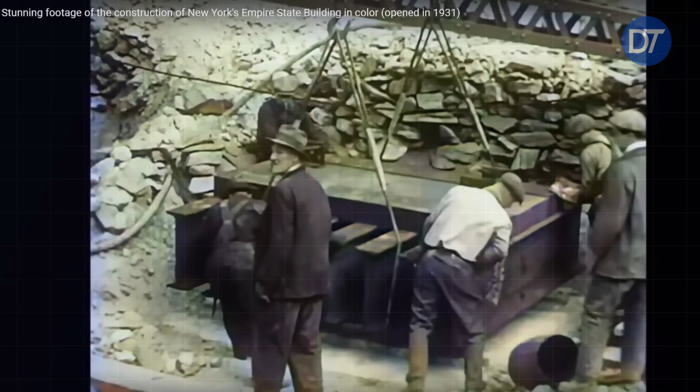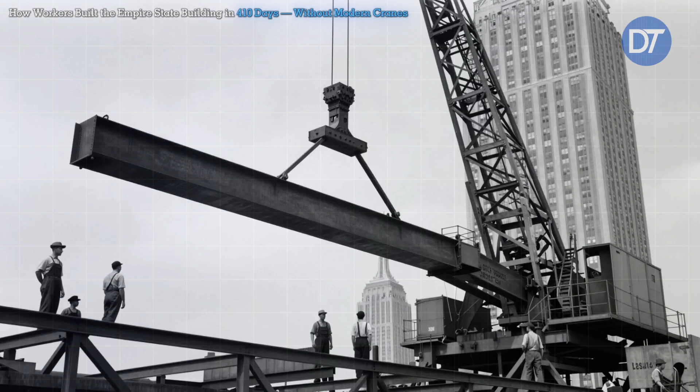The lot was a single block in Midtown Manhattan, boxed in by traffic on every side, and the contract on it called for the tallest building in the world to be standing there in a little over a year. No beam could be stockpiled. No brick could wait. Every piece that arrived had to travel from the truck to the derrick to its place in the sky that same morning, and it had to arrive in the right order.

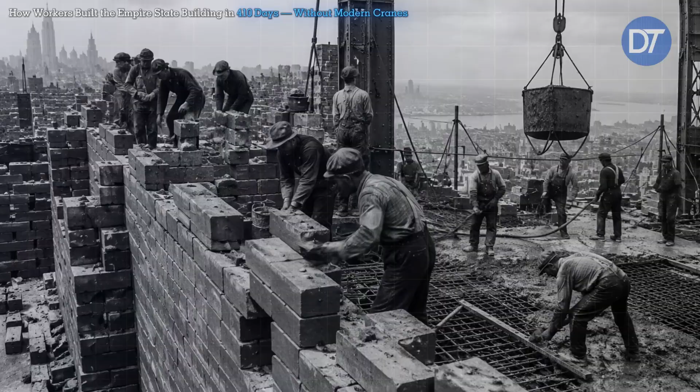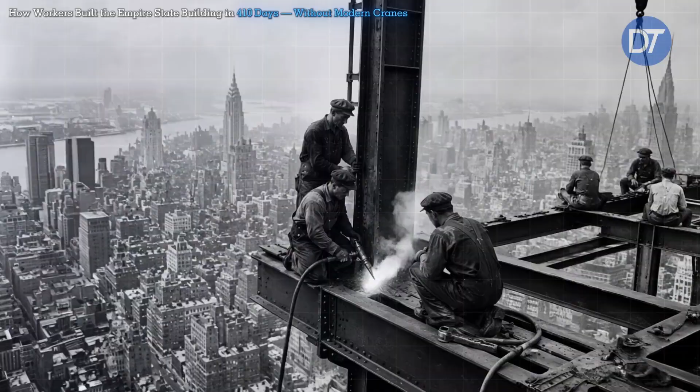There were no cranes standing over the block, the way a modern site would have. Each piece was raised by a derrick bolted to the frame itself, a machine that climbed the tower as it grew. Before the first column ever moved, the project had to be reduced to a sequence of movements that could be repeated without hesitation. That meant deciding not only what the building would look like when finished, but what order every piece would have to follow on its way there.

A column could not simply be delivered when it was ready. It had to arrive when the crew, the derrick, the truck, and the workers above were ready for it. A delay at one point could move through the entire chain. On a site this tight, there was no spare corner where a mistake could be parked and forgotten.

They had to do it while the streets around the site stayed open to traffic, while the neighbors kept the light in their windows, while the money grew tighter every week as the Depression closed in, and while a rival tower a few blocks north had already taken the title they were chasing. That rival was the Chrysler Building, which had raised a spire hidden inside its own crown to reach 1,046 feet and had become, briefly, the tallest structure ever built. The tower rising on Fifth Avenue was designed to pass it and to keep passing whatever came next.

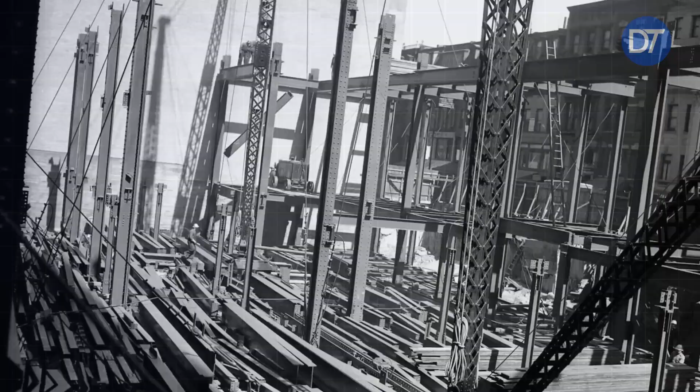The site also had to be designed around the city that already existed. Fifth Avenue could not simply become a private construction road. Pedestrians, automobiles, shops, offices, and neighboring buildings continued their ordinary routines while the tower rose beside them. The work, therefore, had to fit into the rhythm of Manhattan rather than stopping it.

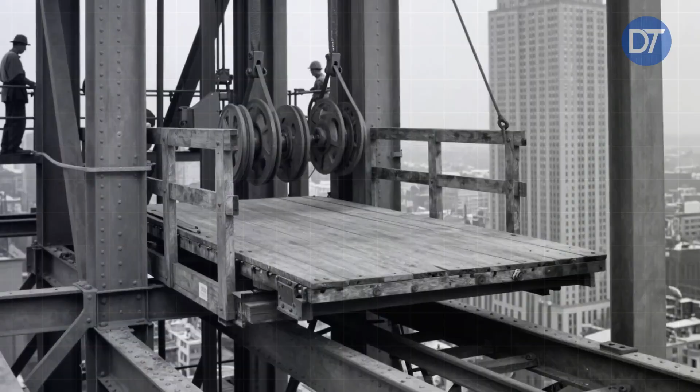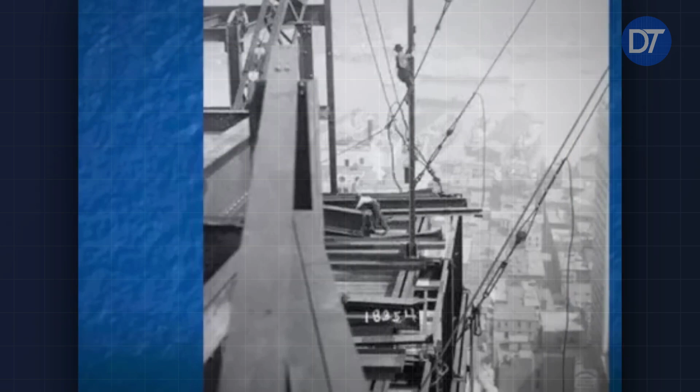Trucks arrived, unloaded, and disappeared. Materials moved upward instead of spreading outward. The higher the building climbed, the more important that discipline became, because every square foot of empty space on the ground was already claimed by something else. The Empire State Building is remembered as a race to the sky. It was really a problem in scheduling, and the height turned out to be the part that came easy.

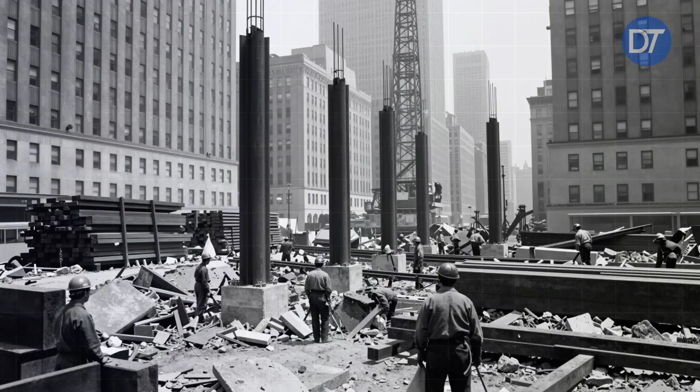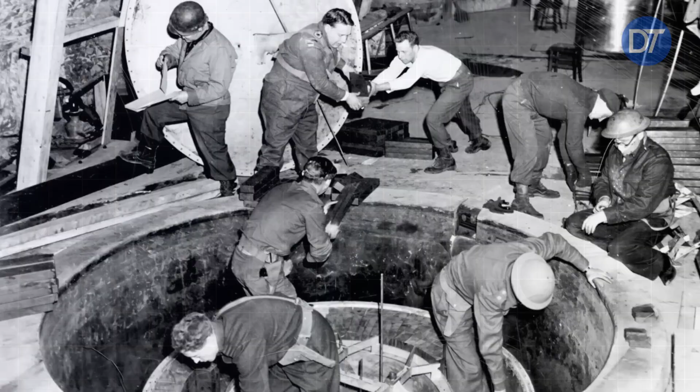This is the story of how 102 floors of steel went up in 410 days. It is the story of a construction site run like a moving factory, where a beam rolled in a Pittsburgh mill could be riveted into the New York sky within days of leaving it. It is the story of the roughly 3,400 men who did the lifting, and whose names the record mostly failed to keep. But before any of that could be scheduled, the design had to survive a set of problems that had defeated every builder who tried to go this high.

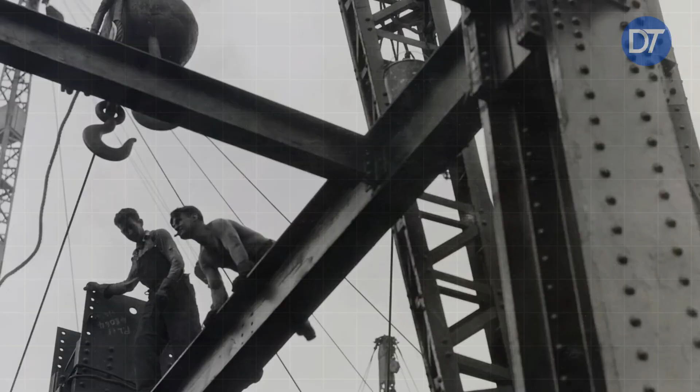That is an easy detail to overlook when looking at the finished building. A completed skyscraper gives no visible clue about the choreography required to assemble it. The finished lobby does not show the delivery schedule. The observation deck does not show the narrow rails used to move materials. The polished stone does not show the men waiting for a hot rivet to arrive.

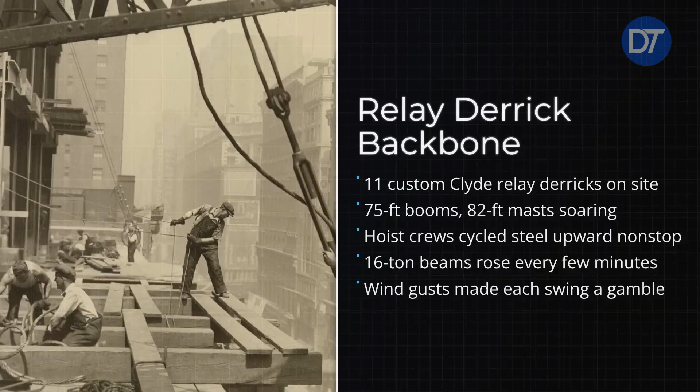The building appears permanent and still, but during construction, almost everything about it was temporary. The derricks, the tracks, the platforms, the work routes, and even the positions where men stood from one day to the next. The first answer was the old one.

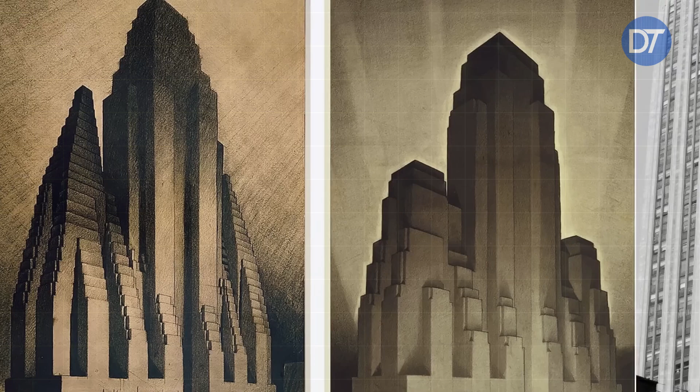For centuries, the way to build tall was to build heavy, with load-bearing walls of stone and brick that carried the weight down to the ground. It was proven, and it was fireproof. It was also impossible here. At 100 stories, the walls at street level would have to be so thick to hold the floors above them that they would swallow the ground floors whole, and the ground floors earned the most rent. A building that ate its own most valuable space was not one anyone would finance.

The second answer was concrete. A reinforced concrete frame would be strong, and it would resist fire better than bare steel.

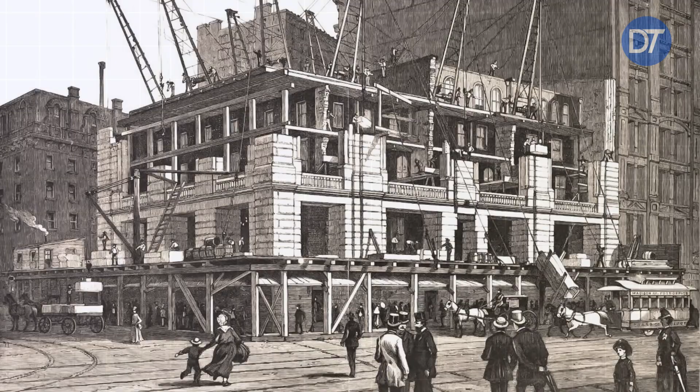But concrete has to be poured in place and then left to cure, floor by floor, and curing takes days each time. The 10th floor cannot be poured until the 9th below it is hardened enough to carry it. Multiply that wait by 100, and the schedule was gone before it began.

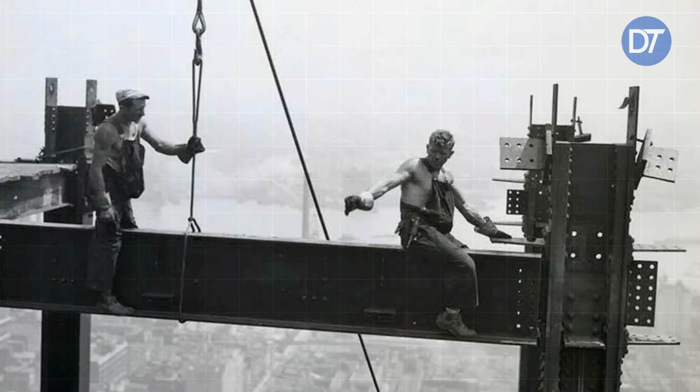The decision to use steel solved one problem and created several others. Steel could carry enormous loads without consuming the huge amount of floor space that masonry walls would have required, but steel also demanded precision. A column had to meet another column at exactly the intended level. A beam had to arrive where the crew expected it.

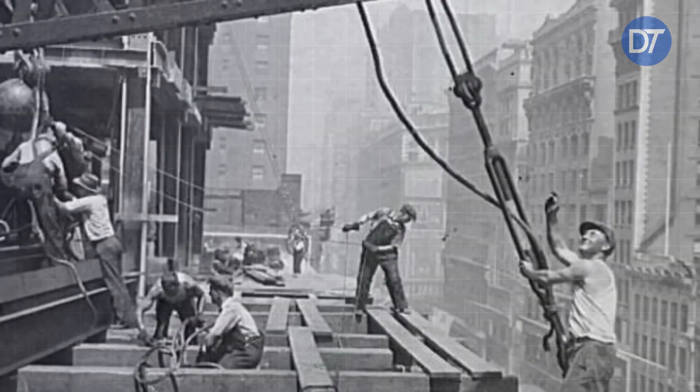Holes drilled at the mill had to line up when separate pieces met hundreds of feet above the street. There was little opportunity to improvise once the pieces were in the air. Accuracy had to be built into the process before the material ever reached the site.

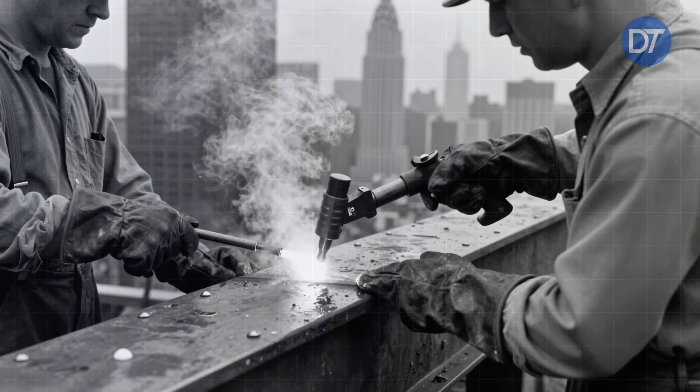The third answer kept the steel, but built it the ordinary way, with materials stacked on site and lifted by cranes standing on the ground. It was standard practice, but it needed two things this site could not give it. It needed room to stack the steel, and there was none. And it needed a crane that could reach the top when no crane on the ground could reach the 80th floor. The lifting could not stay on the ground. It had to climb with the building.

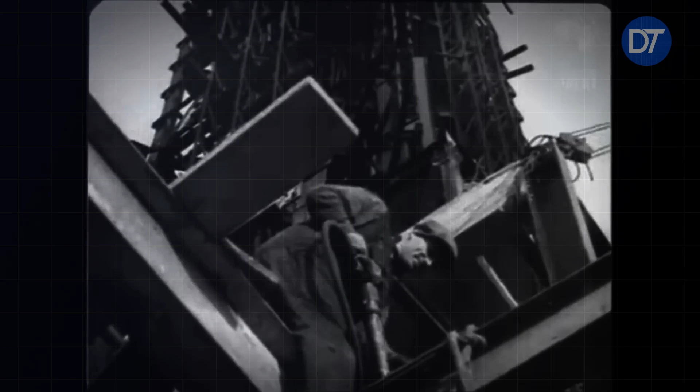The solution was to stop thinking of the site as a building plot and start running it as a production line. The steel would be cut, drilled, and fitted in the mills before it ever reached Manhattan, so that nothing had to be worked on at street level.

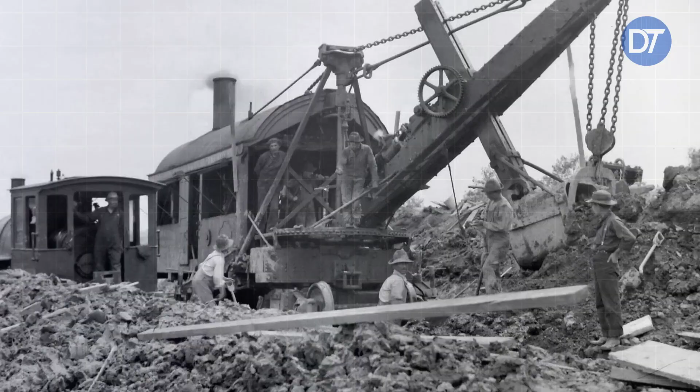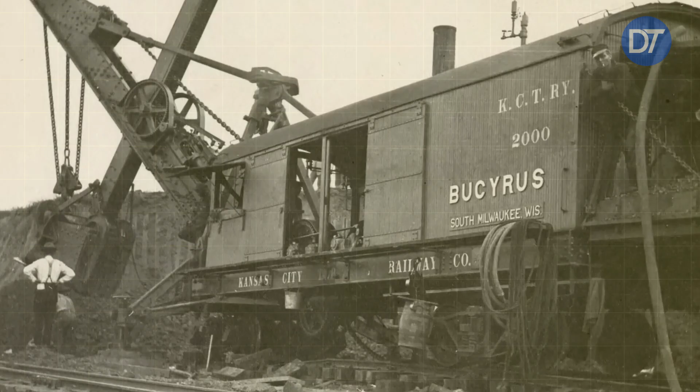It would be delivered just in time, scheduled almost to the hour, so a beam arrived, was hooked, and was lifted without ever touching the ground, and it would be raised by derricks bolted to the frame itself, machines that hauled the steel up a few floors, then were taken apart and rebuilt higher, leapfrogging up the tower as it grew.

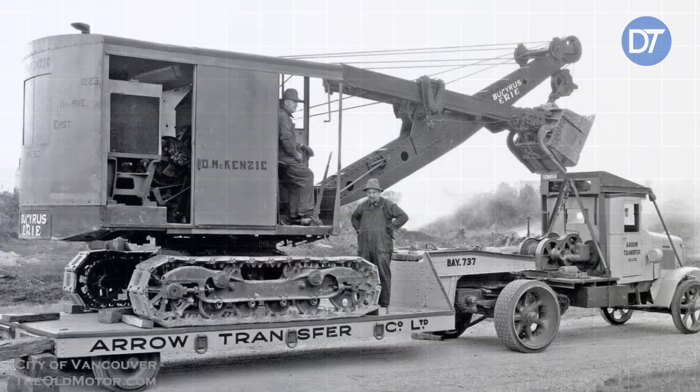The production line idea therefore extended far beyond transportation. It shaped the relationship between the drawing office, the steel mill, the truck driver, the derrick operator, and the men on the frame. Each group depended on the one before it. The drawings determined the pieces, determined the load, determined the delivery, determined the lift, determined when the next crew could begin. What looked from the street like a collection of separate trades was, in practice, one connected operation.

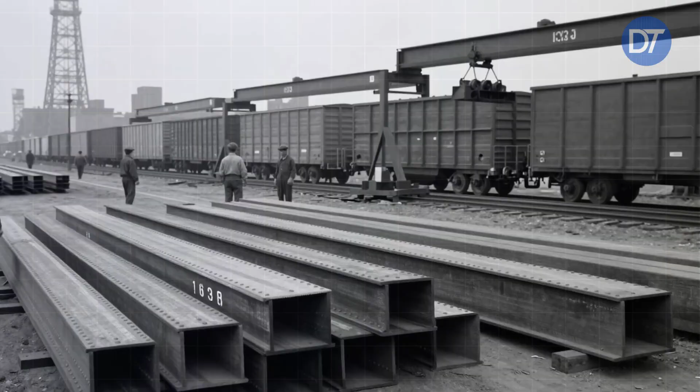The thing that made the site impossible was the same thing that made it fast. Because there was no room to store anything, nothing was allowed to wait, and because nothing could wait, every delivery had to be timed to the moment it was needed. That timing is what let thousands of men work the same cramped block without ever standing in each other's way.

The developers, John Raskob and the former governor Al Smith, had formed a company to build it and handed the job to the contractors Starrett Brothers and Eken. The architects, Shreve, Lamb, and Harmon, drew the whole design in a matter of weeks.

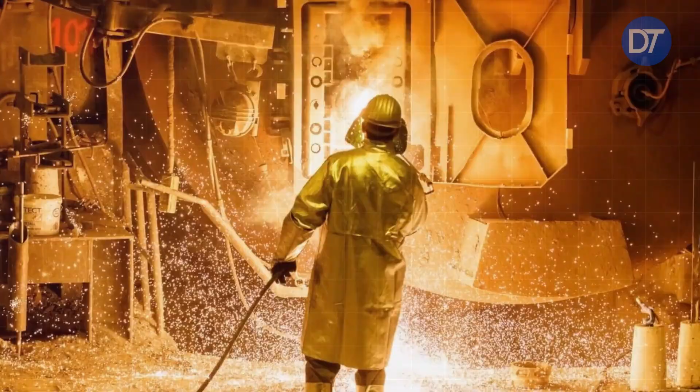The speed was not simply the result of men working faster. It came from removing pauses. If a crew finished one operation and had to wait for the next material, the whole advantage disappeared. If material arrived too early, it occupied space that another crew needed. If it arrived too late, workers were left standing idle. The remarkable achievement was the narrow margin between those failures. The building moved quickly because the process around it was designed to keep moving.

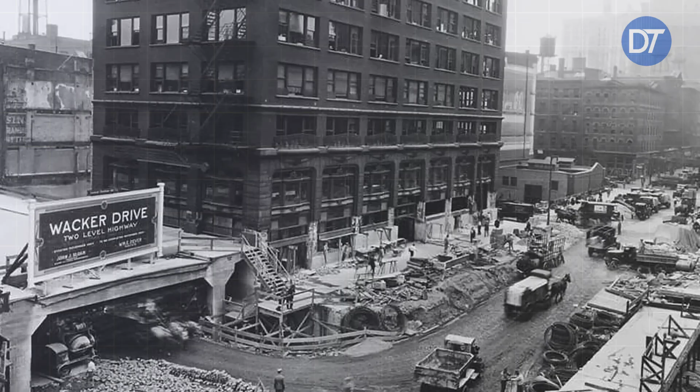What they were building was a steel skeleton 102 stories tall, rising 1,250 feet from the pavement, engineered by Homer Balcom. Every ounce of the building's weight would ride on that frame. The limestone and brick that would clad it were only a skin hung on the steel, holding nothing up. The frame took around 57,000 tons of structural steel, erected by the firm of Post and McCord, and it went up at a pace never seen before, roughly 4.5 floors a week at its best.

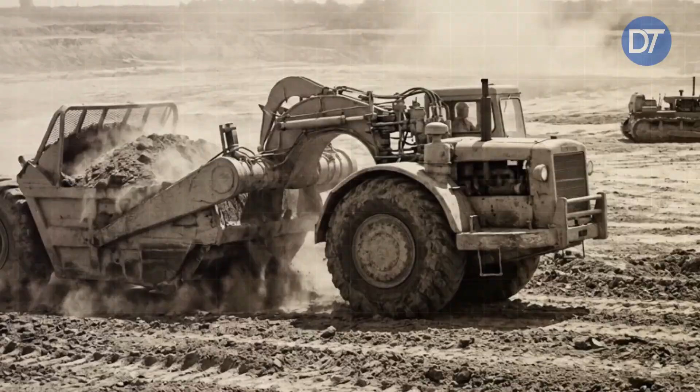There were no tower cranes to do it. The guy derricks that lifted every column had to be dismantled and rebuilt higher by hand, again and again, all the way up. Moving material sideways was its own problem. On each new floor, the crews laid a narrow gauge railway and pushed the brick and stone along it in small hopper cars by hand, because there were no pumps or conveyors to carry material across a floor a quarter of a mile in the air.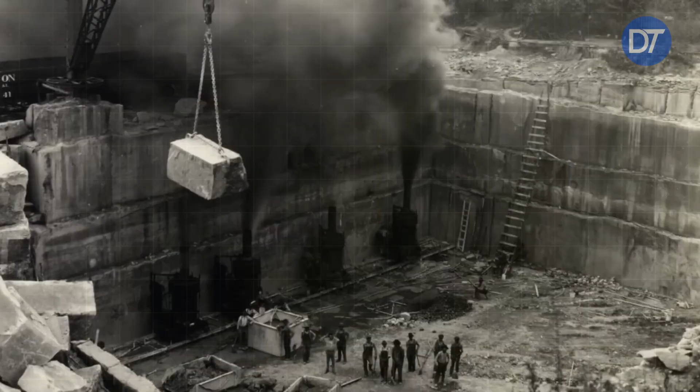To stop the men wasting an hour climbing down for lunch, the builders put kitchens high in the tower and brought the food to them. At the heart of all of it was a single kind of connection, repeated across the frame more times than anyone kept exact count of.

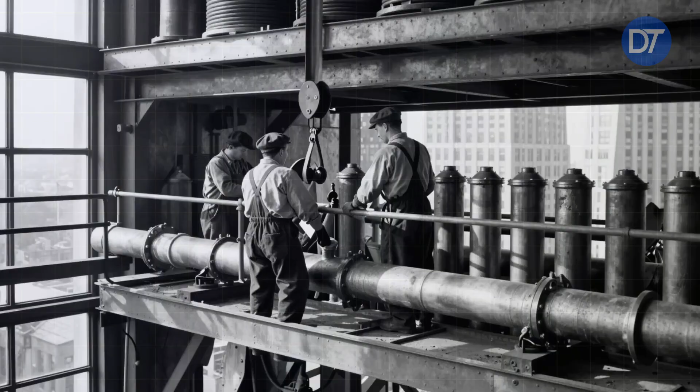The steel was not welded, and it was not held by the high-strength bolts a modern crew would use. It was riveted by hand by gangs of 4, and the whole strength of the building came down to what happened to one small piece of hot metal.

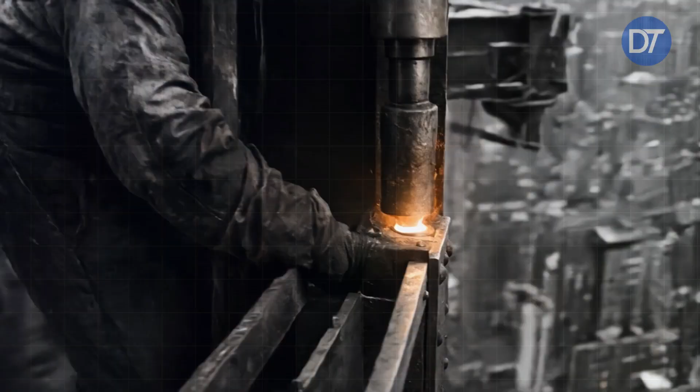A rivet went into the joint, glowing red, and as it cooled, it shrank, pulling the steel plates together and locking them in tension. If a rivet was driven too cold, it would not shrink enough to clamp. If it did not clamp, the joint would work loose, and a frame 1,200 feet tall could not afford joints that worked loose in the wind.

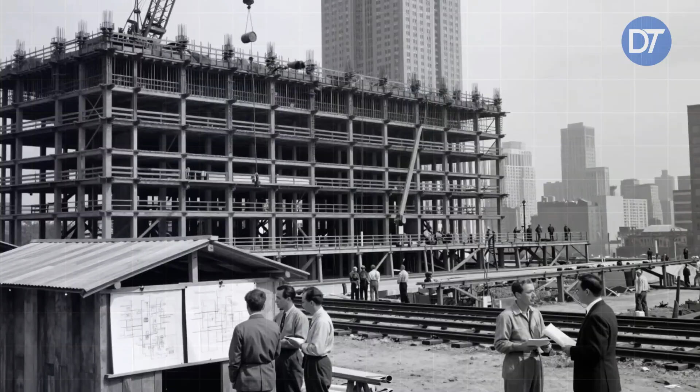The speed of the frame depended on this repetition. The same basic sequence could be performed over and over, but every connection still had to be made correctly. There was no room for a crew to treat one joint casually because hundreds more were waiting behind it. The building was accumulating connections faster than almost any previous structure had attempted, and each one became part of the permanent load path of the tower.

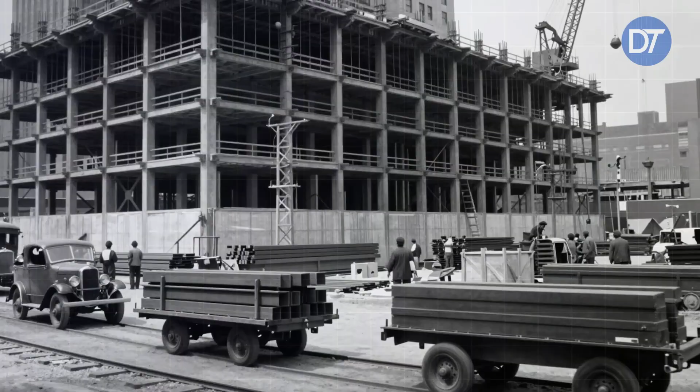Those people here are the 3,400 men who were on this site at its peak, and they are where the story goes next. They came from everywhere the city drew its labor. Immigrants filled the trades, and among the men who walked the high steel were Mohawk iron workers from Kahnawake, near Montreal, who had made a name in this exact work on bridges and towers.

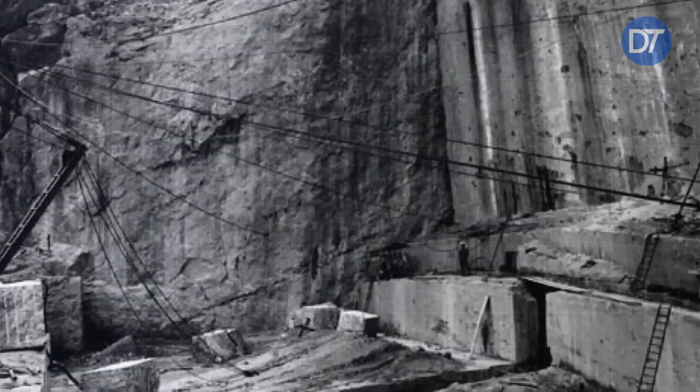The photographer, Lewis Hine, climbed the frame with them and photographed them at it, hanging off cables, sitting on beams with the city dropping away beneath them. There was also a human limit to the system. Machines could lift the steel, but men still had to receive it, guide it, align it, secure it, and connect it. Every increase in speed placed demands on their timing.

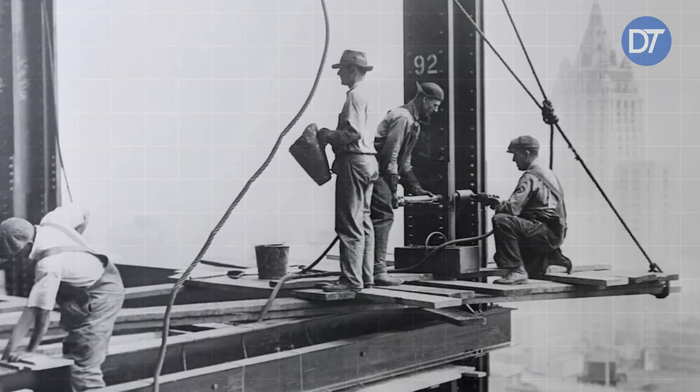A derrick could bring a column to the right place, but the men above had to make the final connection while the piece was moving and while the structure around them was still incomplete. The efficiency of the project depended on experience that could not be reduced to a drawing or a timetable. A working day was spent on open steel with almost nothing between a man and the street far below.

The riveting itself was a piece of choreography. One man, the heater, cooked the rivets in a small forge until they glowed, then threw each one through the air. A second man caught it in a metal can. A third held it in place, while a fourth drove it home with a pneumatic hammer. If the catch was missed, a piece of metal at furnace heat fell toward whoever stood below.

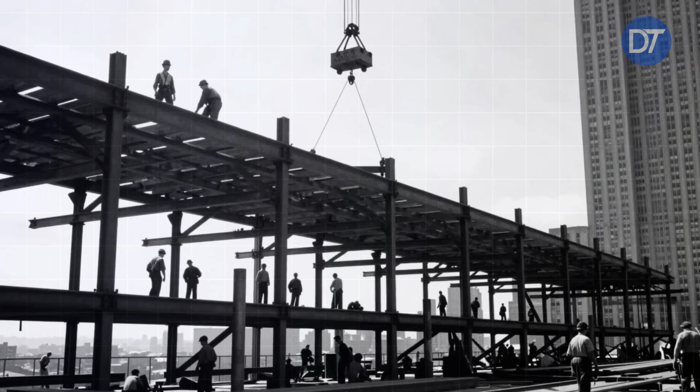The photographs from the period make the height look almost unreal because they freeze moments that would have been ordinary to the workers. A man sits on a beam with nothing visible around him except sky and the grid of the city below. Another stands beside a column that will soon disappear beneath the finished floors. The images are dramatic now, but for the men on the job, they were part of a working environment.

They had to think about the next connection, the next lift, the next rivet, and the next safe place to stand. In winter, the wind came off the open sky, and the steel was too cold to hold with a bare hand. In summer, it burned to the touch. The official count put the number of men killed building it at 5, though the record is thin, and the true figure may be higher than the one the builders were willing to publish.

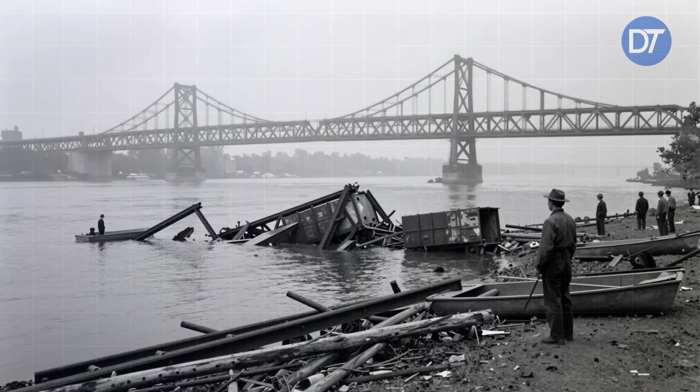The pay was good by the standards of the Depression, when men were glad of any work at all. Whether it was enough is a question the payroll cannot answer, because the payroll was written by the people who set the rates. Hine's camera kept the faces, the paperwork kept the trades. The names of most of these men were never written down anywhere we can now read.

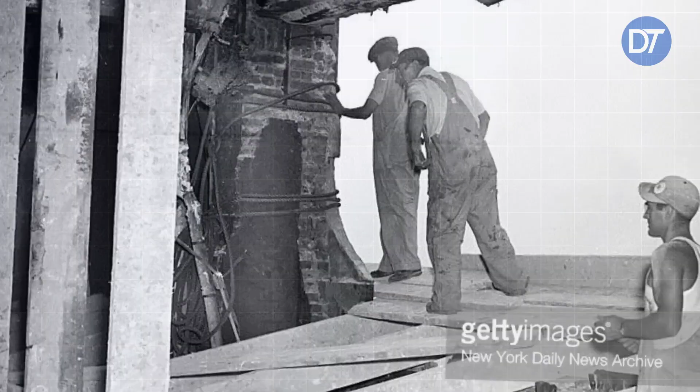The Depression added another dimension to the project. Work was scarce across the country, and a major construction job could draw men who had few alternatives. The building therefore became both a technological project and a source of employment at a moment when employment itself was becoming difficult to find. That does not make the work less dangerous. It makes the choice to take that work easier to understand. Men accepted risks that would be difficult to imagine from a modern office or a modern construction site.

At its fastest, the frame climbed 14 floors in 10 working days. Follow a single story up, and the method is plain.

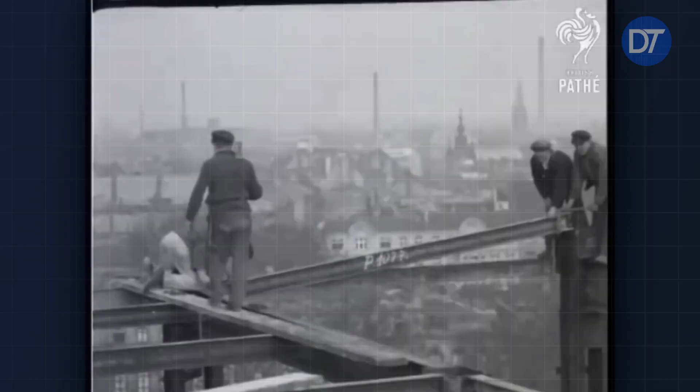A derrick swings a column off the delivery truck and lifts it into the air. The gang above lands its base on the column below and drops in the pins to hold it. Bolts go in to steady it. The plumbing up gang trues it with cable and turnbuckle until it stands exactly vertical. The riveters move in behind them. The floor beams follow, then the arches, then the decking.

The derrick is taken apart and rebuilt one level higher, and the next morning it begins again, one floor a day at the peak, the tower climbing out of the middle of the city in plain view of everyone in it. As the structure rose, the city itself became part of the working environment. Weather could change the conditions on the frame, wind could affect a lift, and cold could make steel difficult to handle. At ground level, the progress was visible to people moving through the streets.

At the upper floors, the workers were operating in a different world, with the sounds and movement of Manhattan far below them. The tower created its own vertical workplace, one that changed every day as another floor appeared. When the frame finally topped out, there was a flag at the summit, and the executives and the press. The men who had set the last beam were mostly already gone. The steel phase was ending. Their part of the job was finished, and they were moving on to the next site, or to no site at all.

The way they built it did not last. Hand riveting gave way to welding and high-strength bolts, quieter and faster and needing fewer men. The guy derricks that had to be rebuilt floor by floor were replaced by tower cranes that climb on their own. Even the height record fell to the towers of the World Trade Center a generation later.

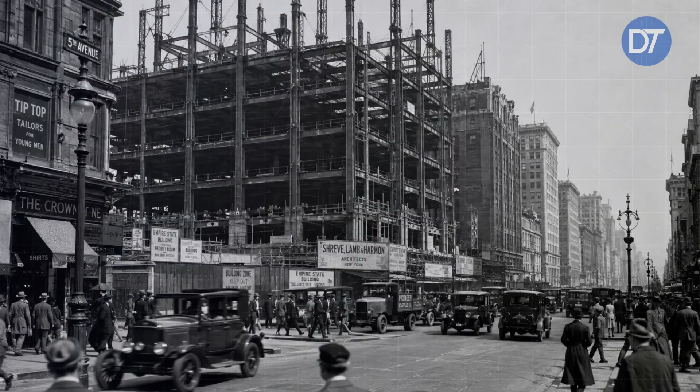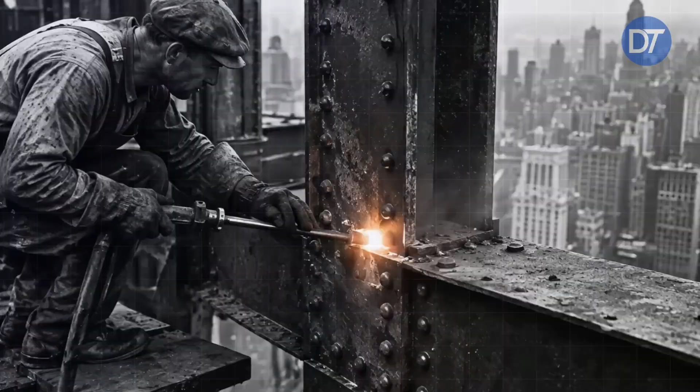The final appearance of the building hides how much temporary work disappeared after completion. The rails were removed, the derricks were moved away, the unfinished openings were enclosed. The tracks and platforms that had made the production system possible were gone. What remained was the permanent frame and the materials attached to it. That is one reason construction history can be misleading. The evidence of the process is often removed by the very success of the process. The better the finished building looks, the easier it is to forget how unfinished and improvised the site once appeared.

What survived was the method. The idea of a construction site run as a scheduled production line with parts made off-site and delivered just in time is now simply how large buildings get built. The men on Fifth Avenue proved it could be done at a scale no one had tried, and the logic of the project can still be read in the building itself.

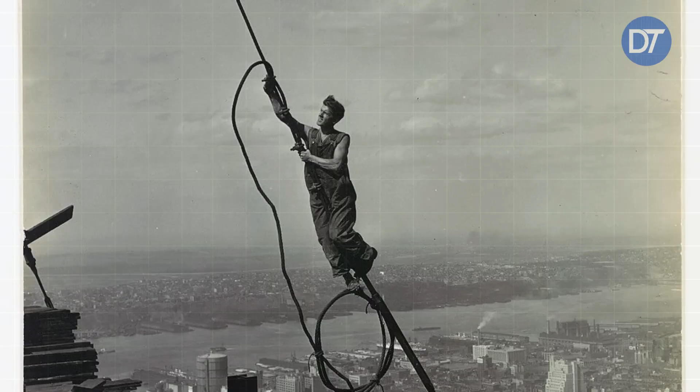The setbacks, the repeated floors, the steel frame, and the vertical organization all reflect a structure designed to be assembled in a particular sequence. The tower was not only a destination at the end of construction, it was also a machine for construction while it was rising. Each completed level created new working positions from which the next level could be built. The building effectively carried its own workplace upward.

Stand on the observation deck on the 86th floor today, and the wind will still push at you more than 1,000 feet up, with the city laid out small below. The steel under your feet is the same steel those gangs riveted into place, still holding the floor exactly where they left it, still plumb after almost a century. Every column you stand on was lifted by a machine that had to be rebuilt higher the day before and riveted by 4 men working a can and a hammer in the open air.

When people picture the age when the skyscraper was new, this is the tower they picture, the one the ape climbed in the film. The reason is not nostalgia. It is that the building still stands exactly true, the frame doing the quiet job the rivets clamped it to do. These were the men who put it there, the riveters and the derrick gangs and the Mohawk iron workers on the high steel. And the work still deserves the recognition their names never got.

That distinction matters when considering the record. The achievement was not merely that a very tall building existed at the end. It was that the builders found a way to make the process repeatable. A single successful lift would not have been enough. The same basic sequence had to work again and again across hundreds of connections and thousands of pieces. The system had to survive changing heights, changing weather, changing crews, and the accumulating complexity of a structure that was becoming larger every day. Not a race to the sky, not one man's monument to himself, but the most precisely organized construction site the world had yet built.